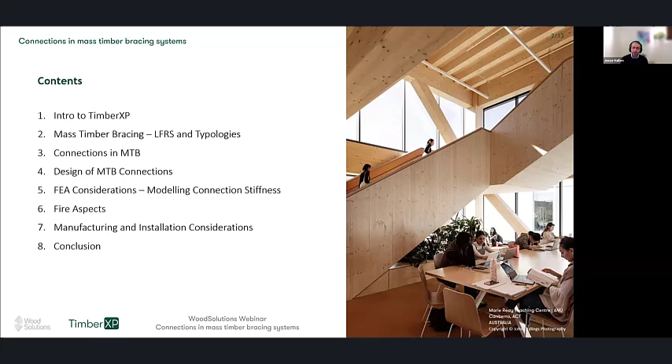TimberXP is a structural engineering consultancy founded early last year. Our company has its origins in Lendlease Design Make, where Marco and I started working together six or seven years ago. If you haven't heard of Design Make, as the name suggests, it was a business unit in Lendlease dedicated to the design and manufacture of mass timber buildings.

Design Make delivered a good portion of Australia's mass timber buildings - projects such as Forte and Library at the Dock in Melbourne, International and Daramu Houses at Barangaroo, 25 King Street in Brisbane, and the Marie Reay Teaching Centre and Fenner Hall student accommodation at the ANU.

After the closure of Design Make, Marco and I continued on for a few years in Lendlease Digital, but we eventually decided to get back to our Design Make roots, and TimberXP was born.

We have a strong focus on mass timber, light timber framing, and hybrid systems. We're happy to get involved in projects large and small, from concept or scheme design through detailed design. We have extensive experience on the R&D side as well, supporting things like kit of parts and modular product development and performing value engineering activities.

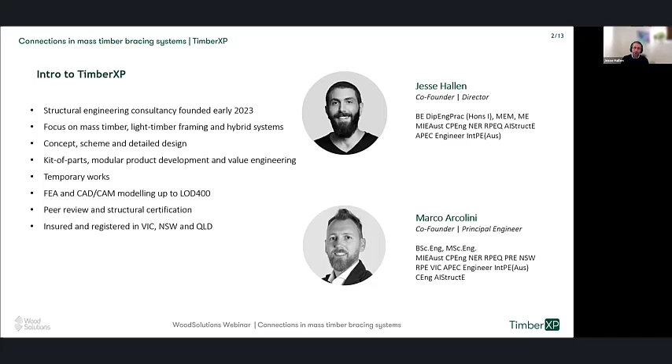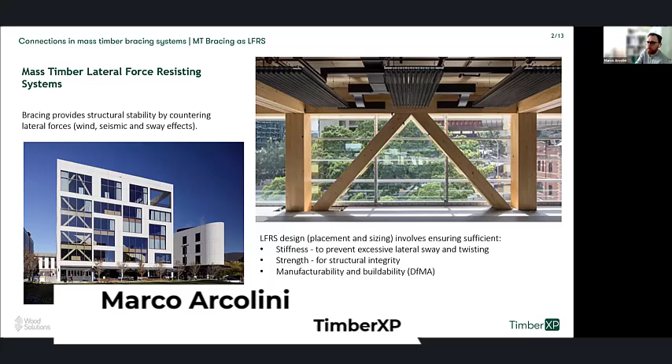Before I start presenting, we appreciate that not everyone in the audience comes from a structural engineering background, so we'll keep our discussion high level and avoid getting too technical.

Let's get started. Bracing systems typically feature a lateral force resisting system that provides structural stability in our buildings. These systems react to lateral forces such as wind and seismic. The placement and sizing of the lateral force resisting system plays a crucial role in ensuring stiffness, important in preventing excessive lateral sway and twisting of the building, as well as providing necessary strength for structural integrity. In addition, by properly designing bracing and connections in mass timber, we can enhance the design for manufacturing and assembly, the DFMA approach that we know quite well.

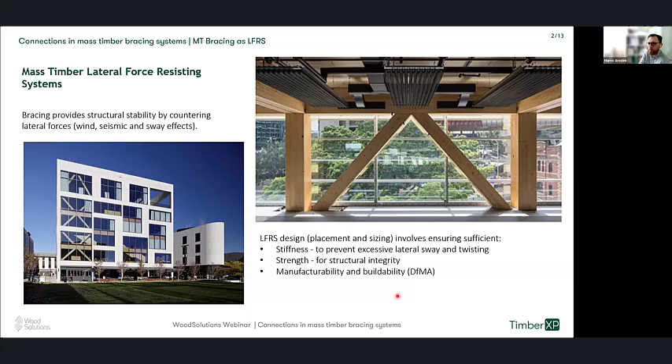This makes manufacturing and installation a very smooth and efficient process. But to achieve that, it's crucial, in our opinion, to start from the beginning thinking about the way you want to not only design but also physically manufacture and erect your building - in this case, the bracing system.

Now we can step into the bracing typologies, each of which has its own pros and cons. Understanding these differences is key in order to properly select the bracing system for a specific given project, making sure you can deploy the most efficient solution for your project.

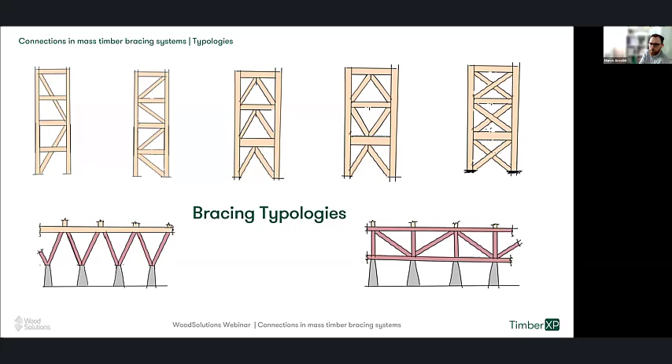In here, for instance, we have several bracing systems applied to specific buildings. Starting from the left, there is the Bond in North Sydney, which uses a multi-story floor bracing system. Its primary advantages include minimal facade impact, fewer elements, and fewer connections to deal with, typically ending up with cost efficiency.

However, it faces some limitations in terms of stiffness and strength compared with other solutions, and probably might pose some challenges from a prefabrication point of view if needed.

The middle one is the International House in Sydney, which is featured by a chevron bracing system, or the well-known inverted V-shaped bracing, which offers high strength and stiffness. But despite these benefits, it might raise some concern in terms of complexity. Comparing to the previous one, given the same building size, this ends up with an additional number of elements to deal with, that we need to manufacture and provide connections for.

Moving to the right one, there is the Marie Reay Teaching Centre back in Canberra, which utilizes a bracing system known very well for its stiffness and strength. However, it might raise some potential concerns, including aesthetics.

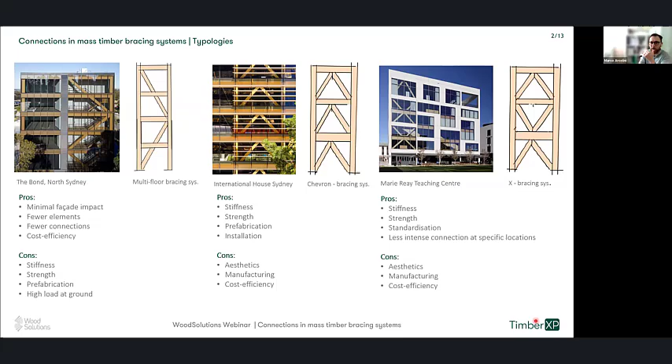Sometimes we have to deal with architectural expectations or clients' needs, where they don't really want us to put bracing through glazing or facade. In addition, it might have some issues in terms of manufacturing implications, which of course might impact the cost efficiency of your buildings.

Another well-known system is the one using Warren truss, or a combination variation of Warren truss, which features, for instance, the colonnade pathway in the International House Sydney. This system excels in aesthetics, glorifying the use of timber and providing this double-high colonnade pathway, which is unique, in my opinion, for this kind of building.

However, it faces issues from a durability and maintenance point of view. For instance, the way the building sits on top of the colonnade might pose some challenge in terms of a transition node for properly transferring the load. It might require additional design specs and time-consuming work for a dedicated transition steel node, which of course is going to impact the cost efficiency of your project.

Finally, we have an example of an X bracing system. The particularity of this one is the location where the bracing intersects, which requires specific attention and solutions in order to deal properly with this kind of detail. The advantage of this system is the great level of stiffness you can achieve, and even the level of prefabrication and standardization you can achieve.

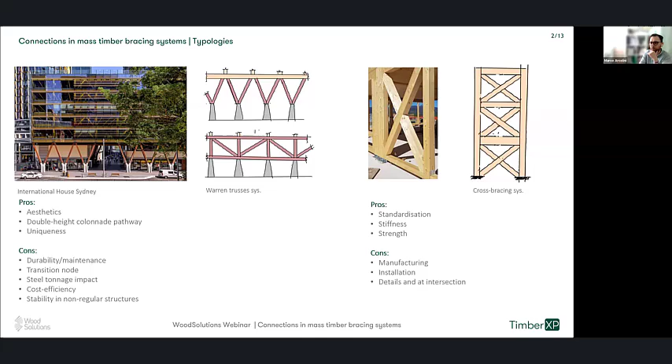Okay, so in terms of connection design, we should probably first discuss what kind of role connections play in timber construction. In my personal opinion, connections are where the truly magic happens. They do much more than just holding pieces and elements together; they're the way we can transform individual pieces into a cohesive functional structure.

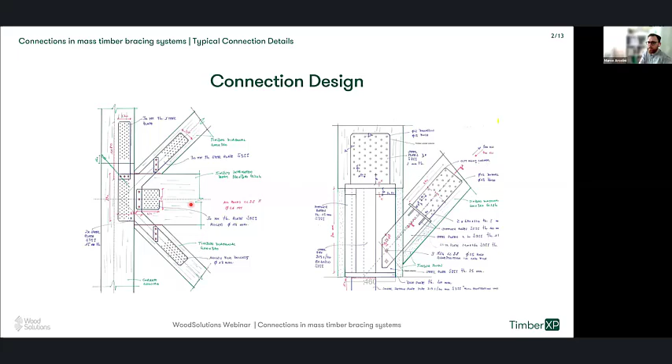So we can definitely say that connections in bracing systems serve two main purposes. They assemble elements into the design and shape we want to achieve, as well as provide the necessary stiffness and strength we need.

Here is the way we can discuss the importance of specific locations and details in mass timber bracing. For instance, we have the middle point in the beam where diagonals intersect, as well as the location where diagonals approach the corner defined by columns and beams.

These locations are crucial in terms of the number of elements to connect, and also in terms of fixing - we need to deal with processing the timber elements in the right way so everything connects together properly.

Another one, very crucial in our opinion, is at the ground level, where the intersection between multiple materials plays an important role. Here we have perhaps steel, timber, and concrete connecting and interfacing together. This is a situation where a very holistic and synergistic approach, talking with suppliers, builders, and installers, plays an important part of your design process.

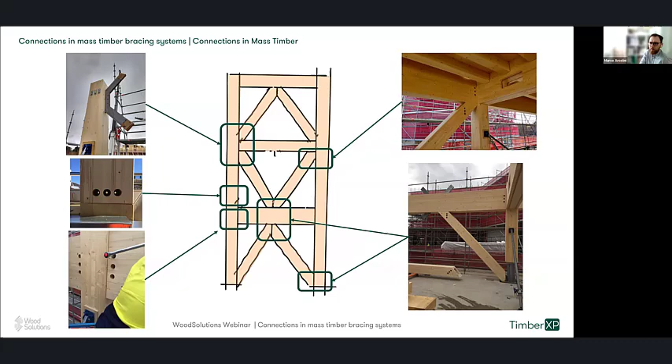There is another variation with 2 flitch plates and side welded steel plates, and also there is the double flitch plates configuration. This one might be the conventional one when experiencing high load to transfer, or in case we need multiple shear planes to achieve a certain level of stiffness.

These flitch plates are usually pre-installed in factory using dowels or self-drilling dowels, which are then protected by timber plugs and covers. Moving on site, bolts are used to secure the connection, just tightening everything together. Further timber covers and plugs are even installed to conceal the connection in order to provide the required fire resistance level.

In addition to this, it's good to mention a good product that can be a game changer for cost efficiency, especially in seismic prone areas. I'm thinking about, for instance, regions such as New Zealand, US, and even some part here in Europe, in which is the kind of product developed by Tectonus.

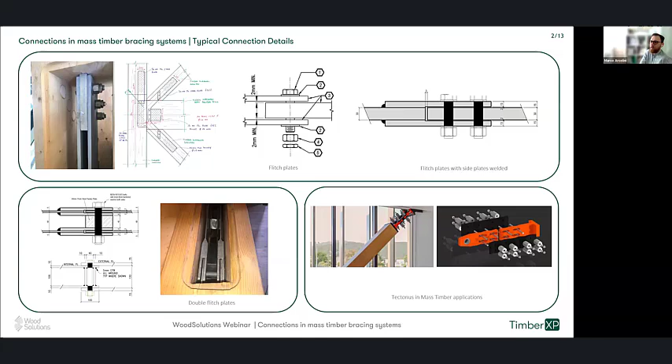Moving into the design aspects, it's crucial to understand the importance of ensuring a specific behavior in timber connections. As I'm sure most of you know, timber doesn't really have post-elastic capacity, which can lead to potential brittle failure. In this scenario, especially in mass timber bracing, our goal is to ensure that any possible failure would occur on the connection side, which, if well designed, will predict the specific mode we want.

So essentially, we can govern the way we want the element to potentially fail. In order to achieve this, there is a kind of best practice we can rely on. Typically, we rely on Johansen theory. This is a theory that is very well known, and it provides us a series of load-bearing formulas that we can use in order to size and configure our connection geometry.

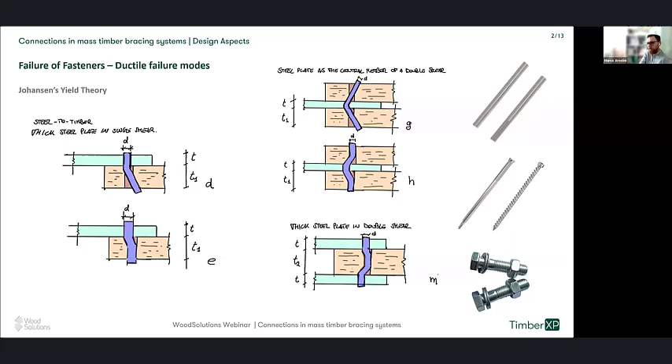And following this method, we can design our connection so that the overall group of fasteners features a kind of ductile mode of failure.

There are tons of R&D done recently in the past that you can rely on. There are also some sort of resources you can rely on in order to pick the best approach for evaluating and capturing that kind of situation in your bracing system, or generally speaking, in any other connection you are designing.

Now that we are in the position to calculate both fastener group capacity and potential brittle failure capacity, what you need to make sure is that the group of fasteners has less capacity than the first brittle failure that could occur in your configuration.

Of course, this approach is always important, but it's even more important in seismic design, where we apply capacity design principle to ensure that the structure fails in locations where energy can be properly dissipated. So we as engineers decide which part of the building we want to fail, and in mass timber, typically we are referring to a specific connection location.

Following this approach, all locations should be designed with a kind of overstrength factor to prevent any possible brittle failure, so making sure we can definitely rely on capacity design.

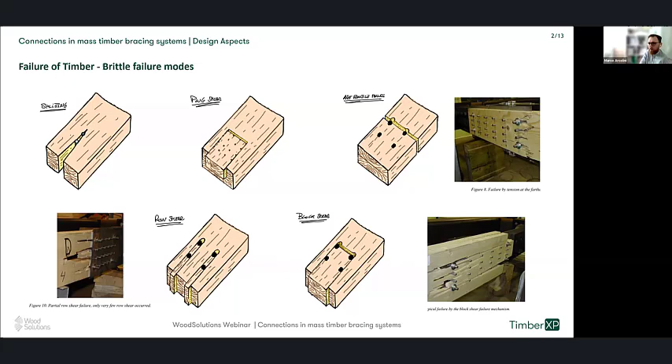We also briefly discussed earlier the importance of designing connections that allow our building to sway and twist within a specific performance level. To capture this, we typically delve into FEA and properly model the bracing by implementing the stiffness. In this scenario, it's crucial to consider the equivalent stiffness, which can be represented for us as a series of springs, from timber, fastener groups, and sometimes steel plates.

In order to address this kind of stiffness, normally we rely on a bunch of formulas you can find, for instance, in Eurocode 5, that provides sets of formulas for different or several configurations you might be dealing with. In addition, we can rely on other well-known formulas for understanding and defining steel plate stiffness.

Now from an FEA perspective, there are various ways and methods you can deploy, and we suggest keeping it as simple as you can. For instance, by calculating the equivalent stiffness of your connection, including any steel plates if needed, and then adding these as kind of end releases to your timber element.

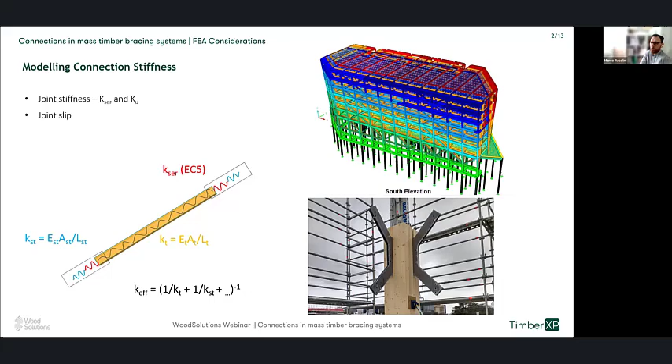Another aspect you might want to consider when you want to capture the overall stiffness behavior of your building is the implication of slip that might occur between, for instance, bolts and steel plates. That kind of slip must be overcome before proper stiffness is engaged. However, this might lead you into nonlinear consideration and analysis, with its own pros and cons, so pay attention when you deploy such a methodology.

Now, from a fire point of view, when addressing fire aspects in timber bracing, it's essential to follow a comprehensive fire strategy that incorporates multiple measures. Key elements include, for instance, compartmentalization, the use of backup systems such as sprinklers, and specific methods related to bracing and connections, such as charring rate methods.

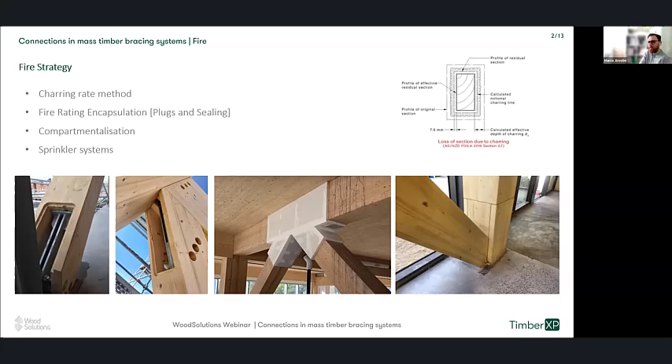In addition, proper cover, timber plugs, and sealing are also crucial in order to protect and achieve the right fire resistance level you have to ensure in your design.

Now, stepping into manufacturing and installation, it's also worth mentioning that if we aim to design and deploy a successful bracing system along with connection details, it's crucial to get involved with the supply chain, builders, and installers as early as possible in the process.

Early supplier involvement is paramount from a manufacturing perspective in order to align with suppliers' capabilities and limitations in terms of production, sourcing, and the degree of prefabrication or pre-installation you can achieve if needed. Understanding the documentation they would expect from you is also very important because it might impact your scope of work.

So there might be suppliers that are totally happy for you to hand over a set of 2D drawings plus a sketch, but there might be somebody else that wants you to achieve an LOD 400 model so they can go straight to processing the element. This is very important because it can impact your scope of work.

From an installation perspective, several factors play a crucial role too. This includes, for instance, logistics, on-site prefabrication if needed, tolerances, connection accessibility, lifting strategies, and sequencing.

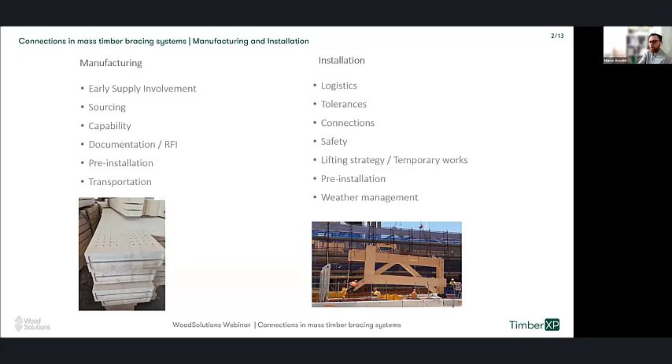And the way you manage all these aspects—manufacturing and installation—is crucial because it can ensure a proper and smooth overall process going through manufacturing to installation, leading to the successful implementation of your bracing system.

We know there might be much more to talk about on this topic, but based on our personal experience, I'd like to share some nuances of connection implications on site.

For instance, when comparing cast-in-place anchors versus post-fix anchors, cast anchors would allow you to transfer higher lateral loads or forces, but of course make installation trickier in dense locations, like you can see here. You might end up with locations full of steel reinforcement, steel mesh, tendons, etc.

Even accessibility for connections can pose challenges. For instance, when there are access limitations from outside the building, installing bolts might be risky and difficult. In such cases, from a design perspective, you might want to deploy a welded nut, pre-fixed on the external side. But this situation might raise tolerance issues—it can be tricky when you slide a bolt through multiple steel plates and ensure you achieve the thread or the welded nut from the side of the building.

And finally, we believe that, for instance, the inverted V-shaped bracing is often better from an installation standpoint compared to a combination of single bracing systems. In fact, with this system, we typically require a precise installation sequence to properly fit the diagonal within the timber frame, which can complicate, in our opinion, the overall process from an installation point of view.

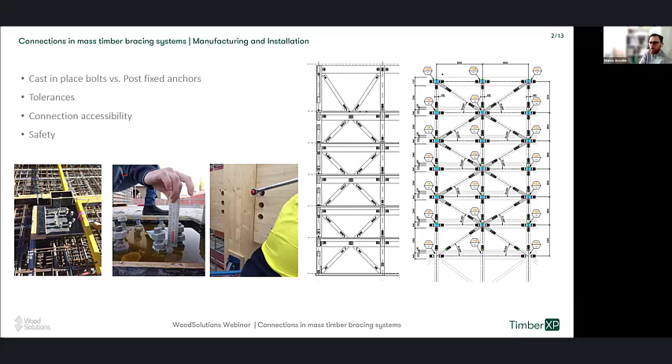Well, so we just had a brief overview of some key aspects you need to consider when designing connections in bracing systems. And if we should condense everything we just discussed in a couple of words, I would probably say holistic approach.

This is what will definitely place you in the best position to deliver a sustainable and cost-efficient connection in bracing systems. So very quickly, we talked about the importance of design in order to provide enough level of stiffness and strength, possibly resilience, and of course the importance of early supply involvement, as well as talking with installers in order to de-risk as much as you can adverse situations you might face on site. And also the multidisciplinary approach.

We didn't really touch on another very important topic in our opinion, which might be facade, and the way facade might impact or interact with bracing systems. Most of the time, bracing is placed all around or along the perimeter of your buildings, and you just need to make sure about facade aspects too.

MEP - sometimes bracing might fall into the footprint of your building, and they might need services and kinds of pipes going through. So in that instance, you need to make sure what the implications might be from a design, manufacturing, and of course installation point of view.

Thank you, Jesse and Marco. Thank you very much for that presentation, Marco. That was a real cavalcade of information on a topic that I know can confuse and really cause a lot of stress for people when they are designing their mass timber buildings.

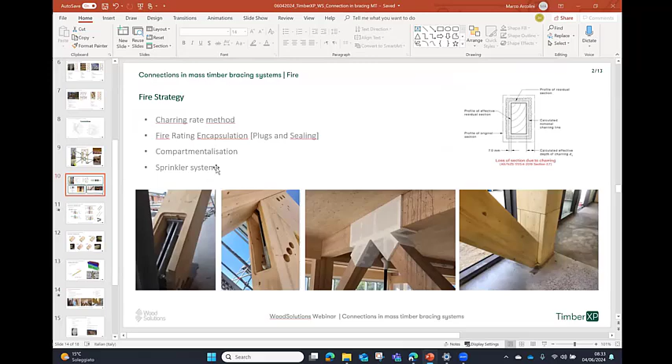So yeah, I was referring to, for instance, these kinds of systems. I'm referring to this kind of system. As you can see, it's a series of flitch plates that essentially are inserted into the specific timber slot. And the timber is going to go through a proper CNC manufacturing process, creating all the kind of recess, notch, and holes you need, allowing for the specific tolerances. And then essentially they are pre-installed by using a series of dowels typically, and they are secured to the timber, and they are then plugged.

So everything can be very clear and polished, and the only thing left on site is essentially the way you need to put elements together. Most of the time, one of the trickiest parts in this case is allowing enough tolerance, both from a steel plate so they can slide together properly, and also when you slide bolts through. Of course, this might pose some issues, because from a structural engineering point of view, we'd like to be as tight as possible so the bracing can be engaged properly and immediately. But from a manufacturing and installation point of view, we definitely need some tolerances. That's exactly what I'm meaning.

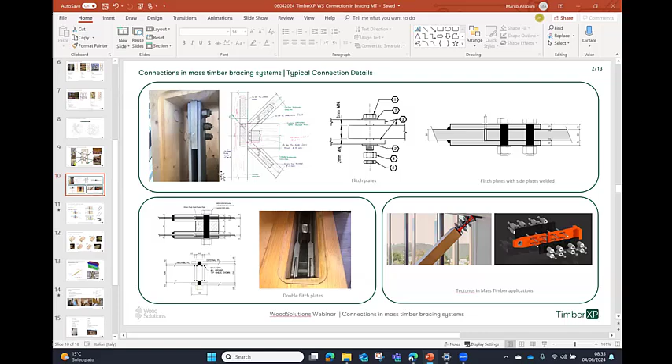What's the best approach to specify a bracing system? Because we see a lot of systems that might be prescribed or set from an architectural standpoint without really being driven by a structural need. There's at least one mass timber building in Australia that's been built that doesn't actually engage its bracing system - it uses the core entirely for its structural stability, and the bracing system is simply there for show. It's just pinned in.

What's your opinion on that? And if someone is an architect trying to figure out what the right move is - because these bracing and truss systems have a huge architectural impact on your building, so you have to commit to something forward at a concept stage - what advice would you give to someone who is not a structural engineer but still has to make those sorts of decisions?